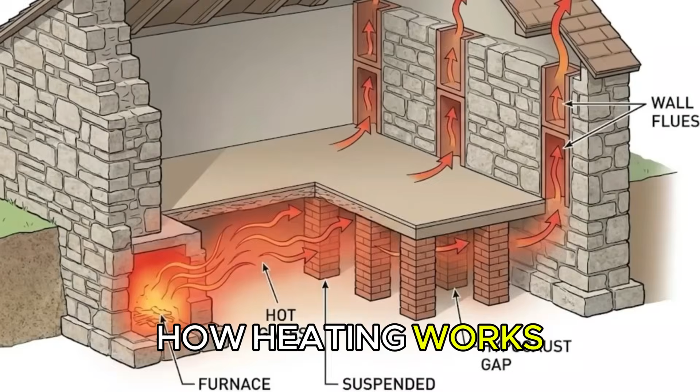Medieval builders understood thermal mass storage, walls that absorb heat during the day and release it slowly for 12 hours. My modern drywall and fiberglass insulation stores zero heat. The moment my furnace stops running, the warmth disappears. Medieval families built heat batteries into their walls. I built monthly payment obligations into mine.

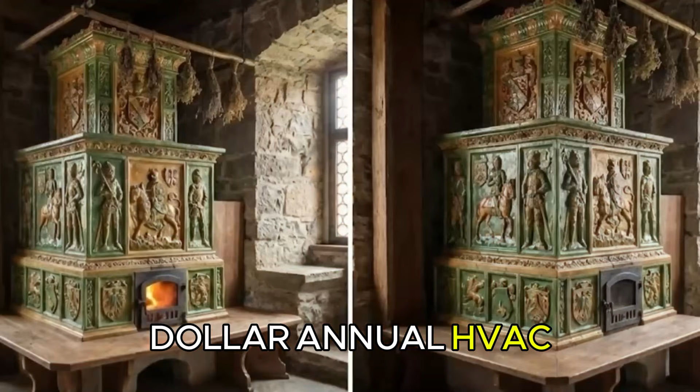Let's be absolutely clear. Medieval heating methods didn't disappear because they failed. They were systematically buried because they worked too well for modern profit models. Think about it. A heating system that costs nothing to operate cannot generate any portion of the $200 billion annual HVAC revenue. What cannot be sold monthly gets methodically erased from building knowledge. Anything that eliminates utility bills threatens two massive industries simultaneously: energy providers and HVAC manufacturers.

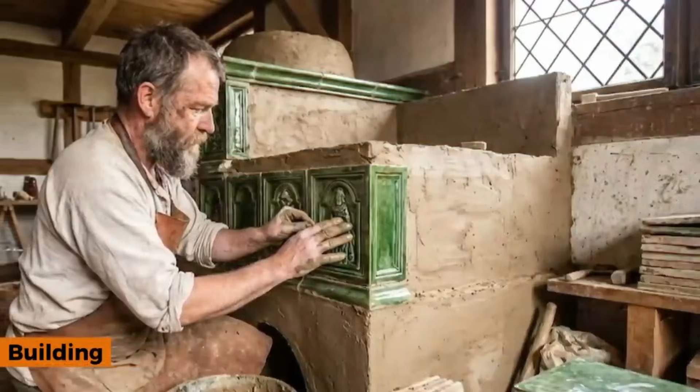The suppression wasn't accomplished through outright bans. It happened gradually through building codes, architectural education, and the normalization of systems requiring constant energy input.

This is forbidden camping, where we crack open vaults the construction industry locks shut. We unearth building techniques that corporations deliberately made you forget. These aren't conspiracy theories. They're documented historical methods that once kept our ancestors comfortable without monthly bills.

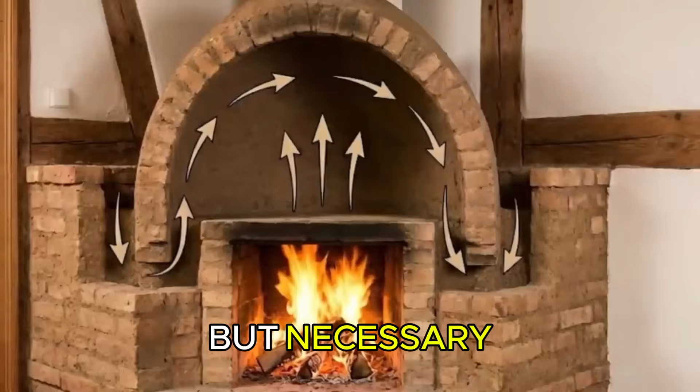The evidence supporting medieval thermal efficiency is overwhelming. The University of Bath conducted a comprehensive study of medieval English cottages and found their thermal mass walls maintained consistent 65 degree Fahrenheit temperatures, even when outside temperatures plummeted to minus 20 degrees Fahrenheit. This wasn't anomalous. It was standard practice.

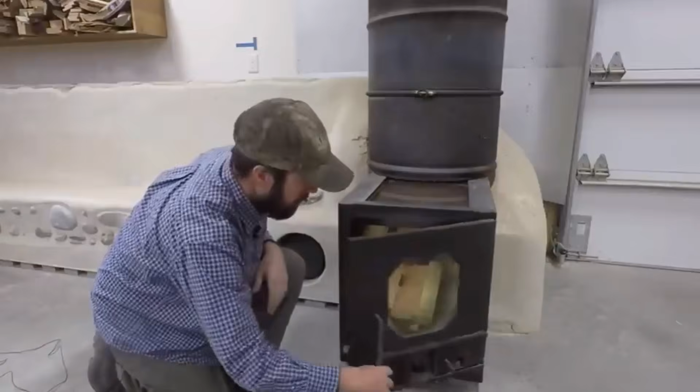Archaeological evidence from 14th century Scottish Highlands reveals homes with remarkably sophisticated zero-fuel heating systems. Their thick stone walls stored daytime heat for nighttime release, a thermal battery that cost nothing to operate. Modern scientific validation comes from MIT thermodynamics research, confirming that stone walls store 50 times more heat than modern drywall. The physics hasn't changed in 800 years, only our willingness to apply it.

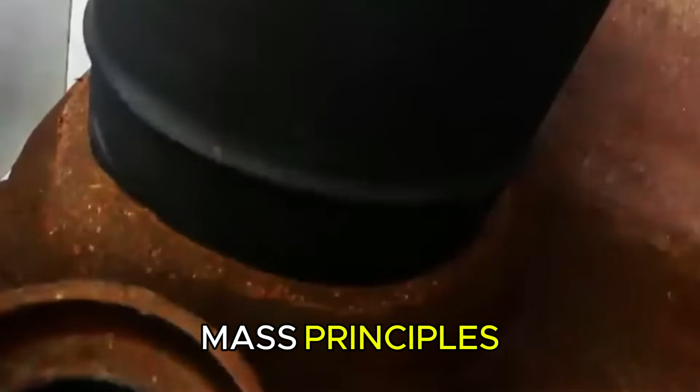Medieval building records preserved in monastery archives document heating techniques that lasted for centuries without modification. The knowledge was so reliable that it was passed down through generations of builders without question. Even today, several modern Scandinavian countries still incorporate thermal mass principles, the same principles that American building codes have effectively banned through minimum R-value requirements that favor fiberglass over thermal storage materials.

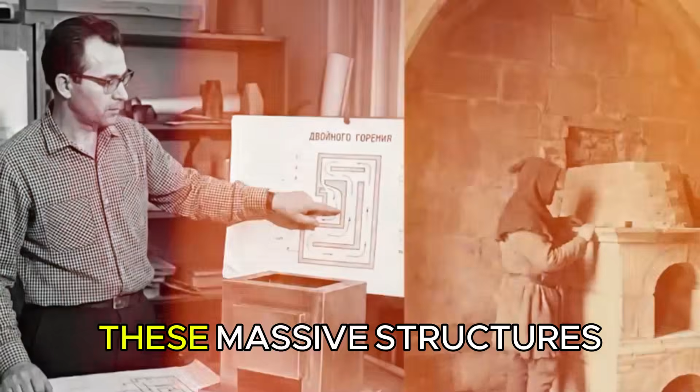By 1200 AD, Norman castle builders had perfected thermal mass heating in English stone keeps. These massive structures maintained livable temperatures with minimal fuel despite brutal winters. The key wasn't constant burning of fires, it was strategic heat storage in stone walls, 2 to 3 feet thick.

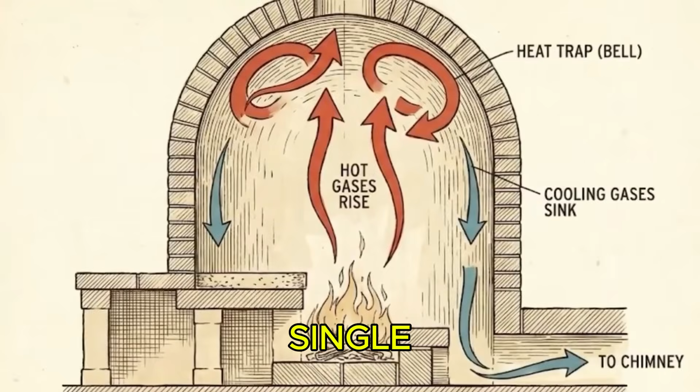Medieval monasteries heated enormous spaces with single central hearths and thermal mass walls. The Great Hall at Penshurst Place in Kent remains standing today, built in 1341, and demonstrates these principles perfectly. Its walls still store and release heat exactly as they did 700 years ago.

14th century Scandinavian longhouses utilized thermal mass floors that captured and stored ground heat. These floors, composed of stone slabs over clay beds, maintained temperatures well above freezing even during the Nordic winter. Scottish Highland cottages from the 1300s with their original thermal mass systems remain intact today. Some have been continuously inhabited for over 600 years with minimal modifications to their heating principles.

What's most telling is that multiple civilizations independently discovered thermal mass storage across different continents. From Pueblo cliff dwellings to Chinese Kang bed stoves, the principle of storing heat in mass was universal human knowledge, until recently. The systematic erasure of thermal mass knowledge accelerated around 1950 when the American building industry consolidated around forced air heating systems, requiring monthly fuel payments.

Post-war housing booms prioritized speed and standardization over thermal efficiency. Building codes gradually eliminated thermal mass requirements in favor of mechanical systems. R value became the only recognized measure of insulation, completely ignoring heat storage capacity.

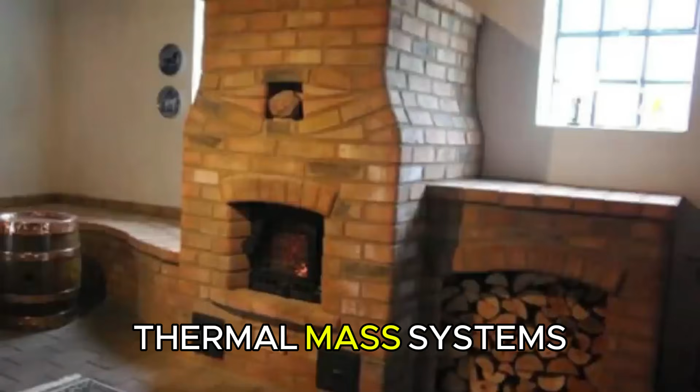HVAC manufacturers lobbied aggressively for codes requiring ductwork and furnaces, regardless of building design or climate. The argument was framed around modern comfort standards, conveniently ignoring that medieval thermal mass systems provided more consistent comfort than cycling forced air systems. The insulation industry promoted barrier methods over thermal storage to create replacement cycles. Fiberglass deteriorates and settles over time, ensuring eventual replacement. Stone walls don't deteriorate over centuries.

Modern architectural education now almost completely ignores thermal mass principles, focusing instead on systems that generate recurring revenue through energy consumption. Most architects today couldn't design an efficiently heated passive structure if their careers depended on it.

The physics is straightforward. Stone and clay absorb heat slowly and release it over 12 to 18 hours, creating a thermal flywheel effect that maintains constant temperatures despite external fluctuations. The specific heat capacity difference between stone and modern drywall is staggering—stone can store approximately 1,000 times more thermal energy per volume. Your drywall walls are essentially thermal sieves, allowing heat to escape almost instantly.

Radiant heat transfer from thermal mass walls keeps humans comfortable at lower air temperatures than forced air. This is why medieval structures could maintain comfort at 60 degrees Fahrenheit, while modern homes feel chilly at 68 degrees Fahrenheit with forced air heat.

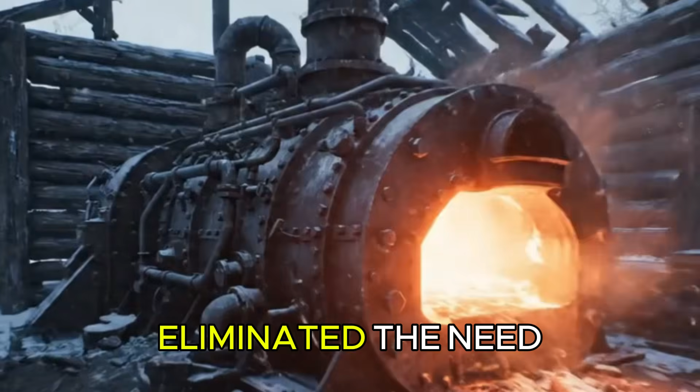Central hearth designs create natural convection currents that distribute heat through thermal mass walls. This simple physics principle eliminated the need for mechanical distribution systems. Modern insulation focuses solely on blocking heat transfer, but stores zero energy for later release—it's like having a water tank with excellent walls but no capacity to hold water. The moment your energy input stops, comfort disappears.

The global HVAC market is valued at approximately $200 billion annually and is projected to reach $350 billion by 2030. Every degree of temperature difference between inside and outside represents billions in profit potential. The genius of the modern heating model is its recurring revenue—monthly gas or electric bills, plus system maintenance and replacement every 15 to 20 years.

A thermal mass heating system, once built, generates zero ongoing revenue. You cannot patent stone, clay, or basic physics principles that have been used for 800 years. There's no intellectual property to protect, no planned obsolescence to engineer, and no subscription model to implement.

Building codes are largely written by industry associations that ensure mechanical heating system requirements. The International Mechanical Code references standards developed by the Air Conditioning, Heating, and Refrigeration Institute, a trade organization representing manufacturers.

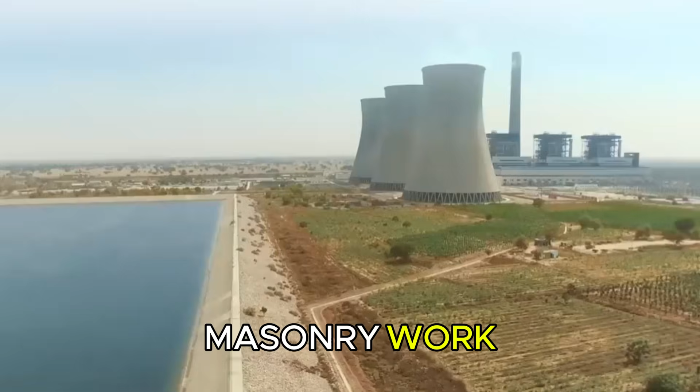To be fair, thermal mass heating isn't perfect for all situations. It requires specific climate conditions and building orientation to maximize solar gain, and works best in climates with significant day-night temperature swings. Initial construction costs are higher due to thicker walls and specialized masonry work—you're essentially building a heat battery into your structure, which requires more material than conventional framing. These systems aren't suitable for all architectural styles or urban density requirements; you need space for proper thermal mass walls, which conflicts with maximizing floor area on expensive urban lots.

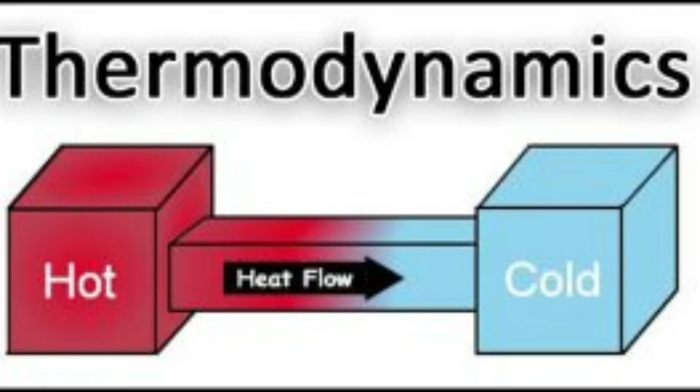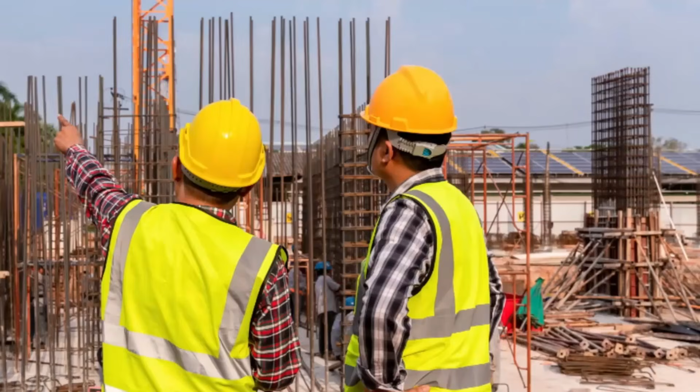Optimal performance requires understanding solar gain and thermodynamics. This knowledge has been systematically removed from construction education, making implementation challenging. Modern safety codes may require backup heating systems regardless of thermal mass efficiency, which can duplicate costs for builders trying to implement these principles. For those brave enough to implement these principles, source thermal mass materials for 18 to 24-inch

stone or rammed earth walls, primarily on south-facing exposures to capture maximum solar gain. Calculate central hearth placement based on the thermal mass radius for even heat distribution—medieval builders positioned hearths to maximize convection currents throughout the structure. Use clay mortar recipes with local materials as documented by medieval builders; these allow thermal transfer between stones while maintaining structural integrity.

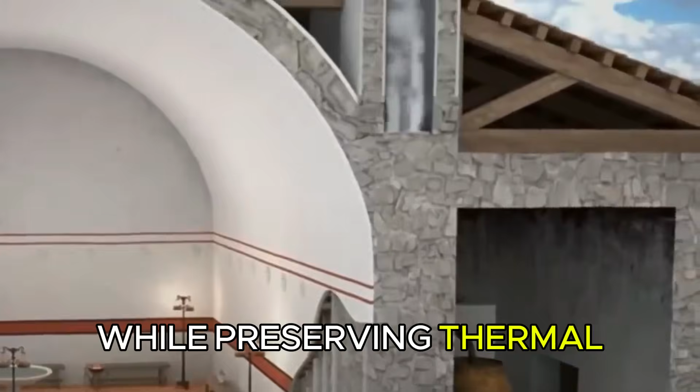Implement thermal mass floor systems using stone or clay tiles over an insulated base. These store heat from both solar gain and the central heat source. The key is intelligent integration with modern building codes while preserving thermal mass principles. This often means building a conventional structure on paper while incorporating thermal mass elements that building inspectors recognize as decorative features.

Consider this real-world example. A modern homeowner in Vermont built a thermal mass addition to their conventional home. Their heating costs dropped by 80% the first winter, translating to an annual heating bill reduction from $2,400 to approximately $400 using medieval thermal mass principles. The construction cost $8,000 more than conventional framing, but eliminated most of their monthly heating bills. The family reports more consistent, comfortable temperatures than their previous forced air system provided.

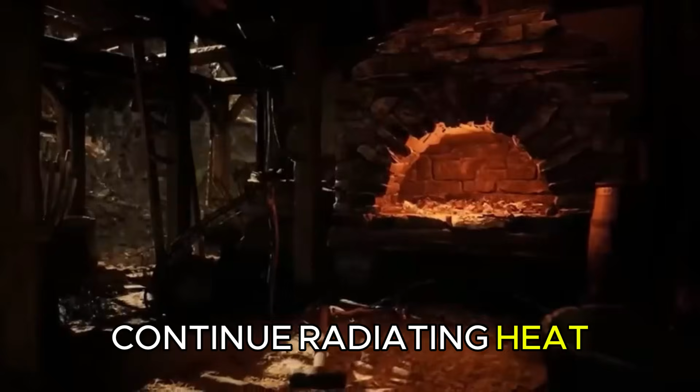Most importantly, the thermal mass walls continue radiating heat 8 hours after their fire goes out, maintaining comfort throughout the night without burning additional fuel.

This knowledge never truly disappeared—it was systematically removed from building education. Medieval families heated homes for free, while modern families collectively pay $200 billion annually for the privilege of staying warm. Your grandmother understood thermal mass heating intuitively before the HVAC industry buried this knowledge. The techniques still work exactly as they did 700 years ago because physics doesn't change based on corporate profit models. Today's building codes ensure you cannot legally build what medieval peasants constructed for basic survival. Think about that paradox: we've regressed to the point where peasant knowledge is forbidden to modern homeowners.